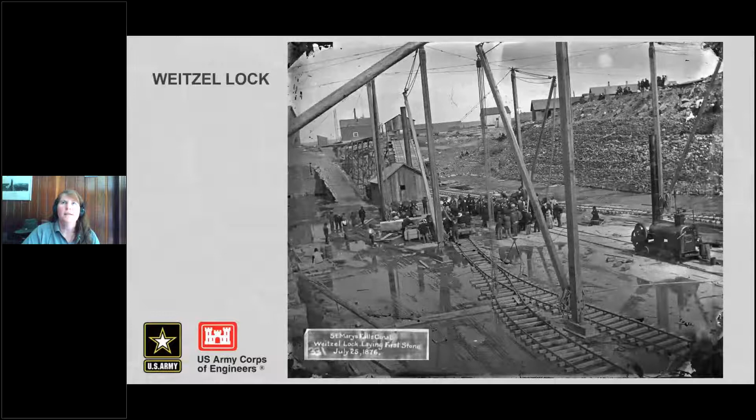The U.S. Army Corps of Engineers took on building a new lock just south of the original state lock. It's basically where the MacArthur lock is today, if you've been to the Soo Locks. The excavation began in 1873, and this photo, taken 3 years later, shows the laying of the first stone. So that's right over here - you've got a nice little crowd of people come to watch. This stone, by the way, is in the park, so if you visit the Soo Locks, you can actually go and see this first stone for the Weitzel lock.

We only have a few construction photos of the Weitzel lock. This one, taken a year after laying that stone, so this picture is 1877. You can see that it's being made with cut stone blocks, and you can kind of start to see this chamber starting to take shape.

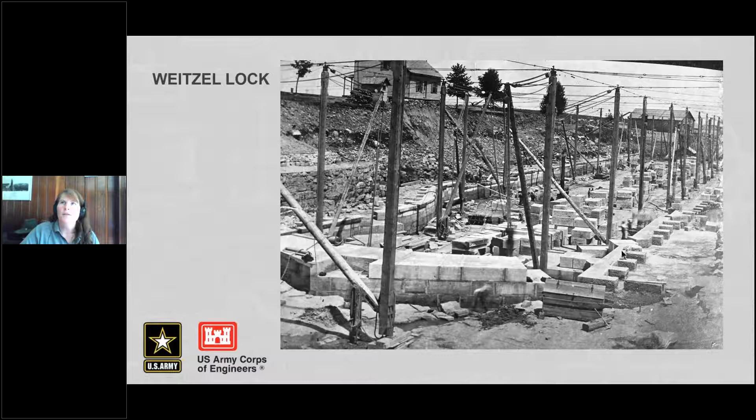The Weitzel lock: 515 feet long, 80 feet wide, 17 feet deep. When it opened in 1881, Michigan got completely out of the Soo Lock business, and the entire facility was turned over to the federal government, and the U.S. Army Corps of Engineers has operated and managed it ever since.

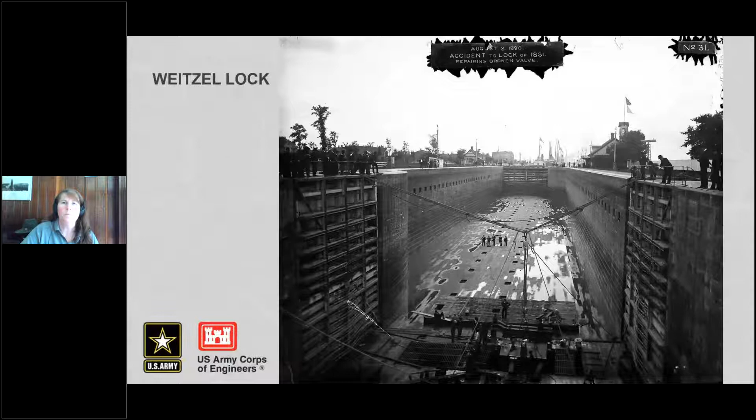This is one of my favorite photos. What amazes me are these little boys down here in the lock. This is a big opening with water flowing through it, and these kids are just running around down here barefoot. I don't know how they got in and out, I presume there must have been a really tall ladder. This is about a 40-foot drop from the surface to the lock floor. And look at all these people on the edges, no rails, they're all just standing around to watch. It's amazing.

I'll also point out this lock is shut down. It's August 3rd, 1890. That means there is no traffic passing through the locks because there are no locks—the state lock is now a construction site, and there are no locks on the Canadian side of the river. Despite being shut down, this lock set a new record that year. It moved over 9 million tons of cargo in 10,577 passages, an average of 46 passages a day during its operating season. And now it's shut down for several days to make a repair.

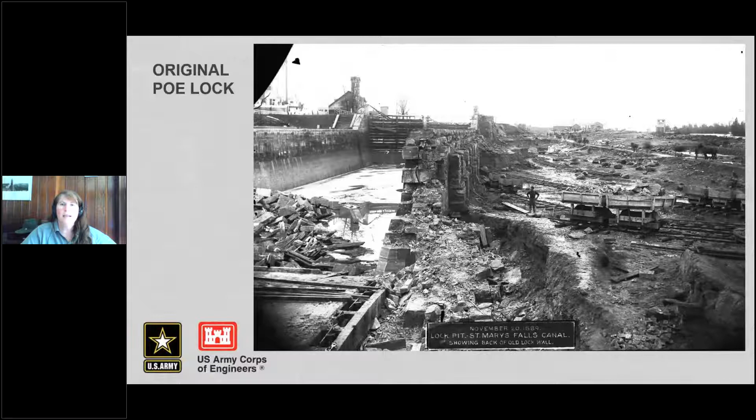And this is one of the last photos of the chamber of the state lock. So here you see the recesses for its gates, and this is one of its chambers.

And actually I have no reason for this other than I love that dog. He's one of several dogs that show up in the construction photos. And I have to say I wish we had a Soo Locks dog now.

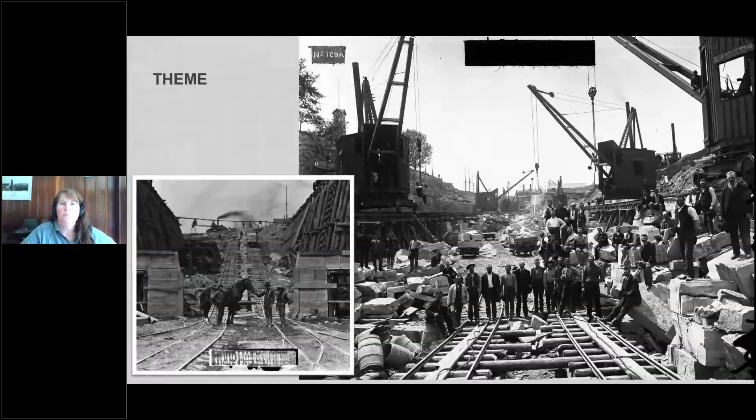Like the Weitzel and state locks, this lock was stone masonry construction. The area now known as Brady Park was the site of Fort Brady at that time, and they had a pier here for loading and unloading vessels, with stiff leg cranes for unloading vessels, and a mobile crane for moving stone within the work area.

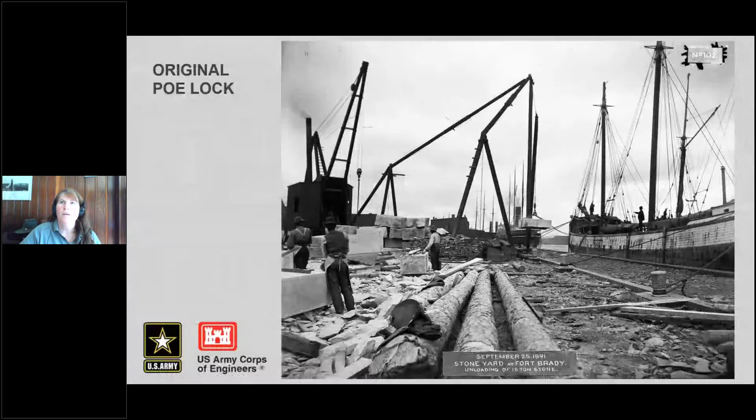Here you see one of the stiff legs unloading the quarried stone from one of the barges. There was a planer in Fort Brady which they used to finish the stone. Once the stone was finished, they had to load it back onto barges to take it to the work site, because the work site is north of the Weitzel Lock, so it's essentially an island.

Once on site, they use these mobile cranes to set the blocks in place. Here they're just finishing up one of the miter walls, and everybody came along to pose.

One of the things I think is kind of interesting too is just the sheer amount of work that went into these auxiliary items for construction. So you have to build this span, this bridge practically, to run your mobile cranes on. They've had to build a little roadway going up with a rail line. And then, of course, they have all these stiff leg cranes for unloading the barges that are bringing materials.

Once the chamber monolith was constructed - that's the lock walls, the outer structure of the lock - there was still a lot to be done. These guys are testing bolts. This is a wooden floor, just like the Weitzel lock, so it's all going to be bolted down.

I will also mention most of the negatives in the glass plate collection are pictures of big things and big structures and lots of documenting of machines and parts and rock. These are some of my favorite photos that actually show the guys working and the hard work that went into it, and you can really see the effort they're putting into it. Any of you who follow our Facebook page and the winter work images will probably know that I'm kind of biased, because these are the kind of photos I also like to take.

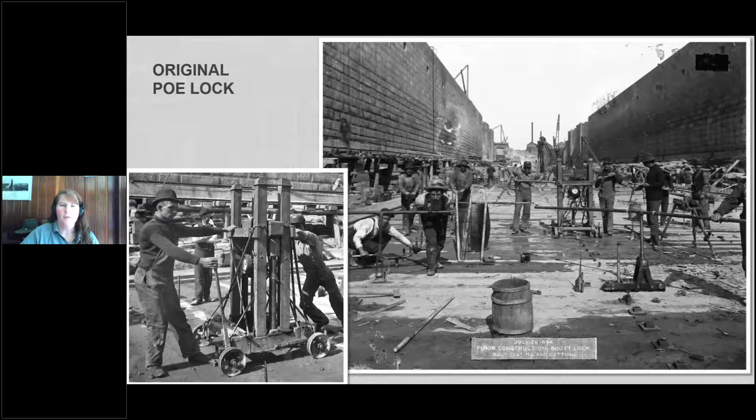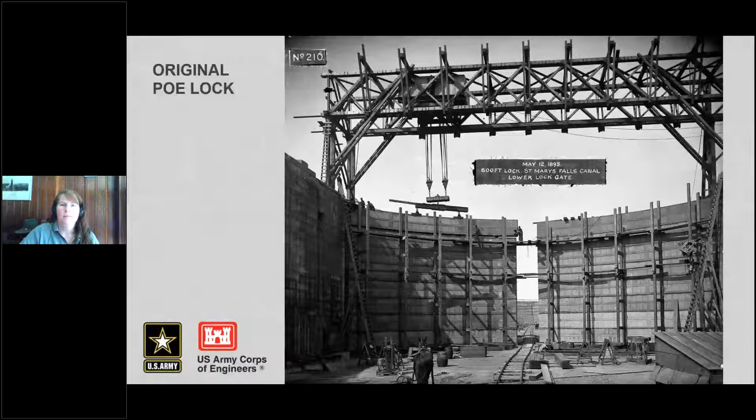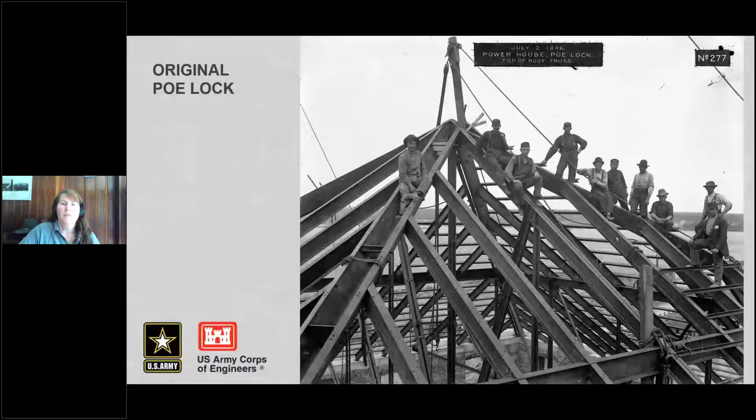On August 3rd, 1896, the Poe Lock officially opens. The U.S. Hancock, U.S. Antelope, and U.S. Revenue Cutter Andrew Jackson were the very first vessels to pass through.

So the name of the Poe Lock, I will confess, I get a lot of strange looks when I'm talking to the public about it. It's actually named for this gentleman, General Orlando M. Poe. He was a Civil War general, and he served twice as the Detroit District Commander.

He oversaw the design of a very distinctive Great Lakes lighthouse style with large conical towers and attached dwellings, kind of like the Au Sable Light or Spectacle Reef Light. He was overseeing the construction of the Poe Lock, of course. He had come up for an inspection of the work site in late 1895, and he was injured.

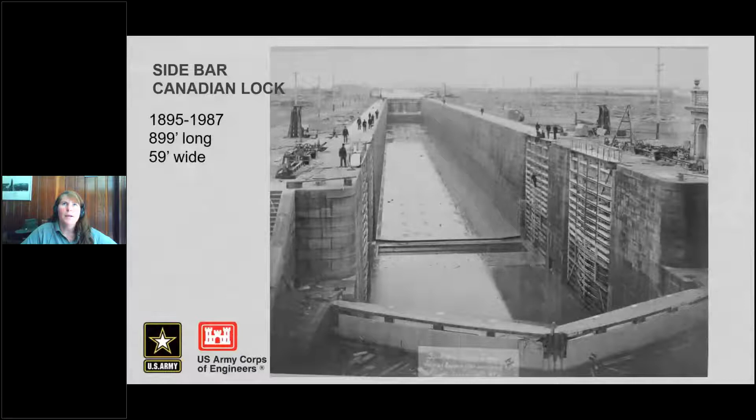Here we see a picture from the 1909 lock accident, which was pretty exciting to be there, I presume. The lock was at high pool. There was a passenger vessel, the Assiniboia, in the lock, secured to the wall. The Crescent City, a freighter loaded with iron ore, was coming into the lock, so the water is up 21 feet higher than what you see here.

Below the lock, the freighter Perry G. Walker rammed the gates and caused a breach, which ended up forcing these gates open. The upper gates, you'll recall, were open because the other boat was coming in, and basically it sent a wall of water 20 feet high out of the lock. The two vessels came screaming out at about 40 miles an hour, and it tore these gates off their anchorages—this one is completely flat, facing the reverse direction it's supposed to go.

They were able to use their emergency swing dam. This is kind of like a swing bridge, but it swings across the lock. They drop these shutters down, or wickets down, and then they lower the shutters within the wickets. Within three hours, they had the water under control enough to be able to operate auxiliary gates and start making repairs.

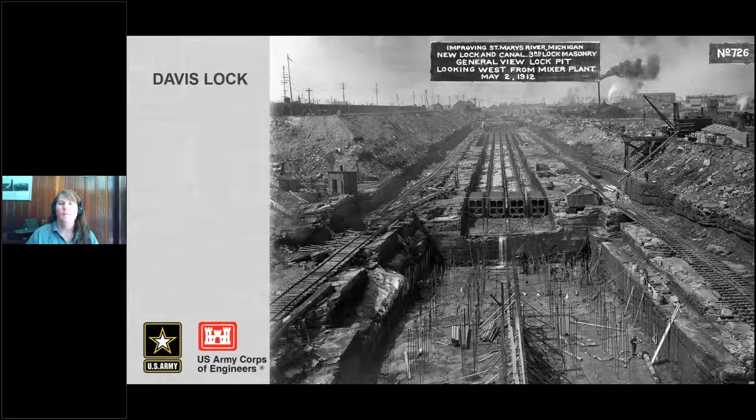I want to point out the channeled rock here. They had to cut through the bedrock to make the space to put the lock in. Here you can see a close-up of those culvert forms, and another nice picture of the guys working. I'll point out one of our volunteers, it was a member of her family that owned the lumber mill that sold most of the lumber to make all of these forms.

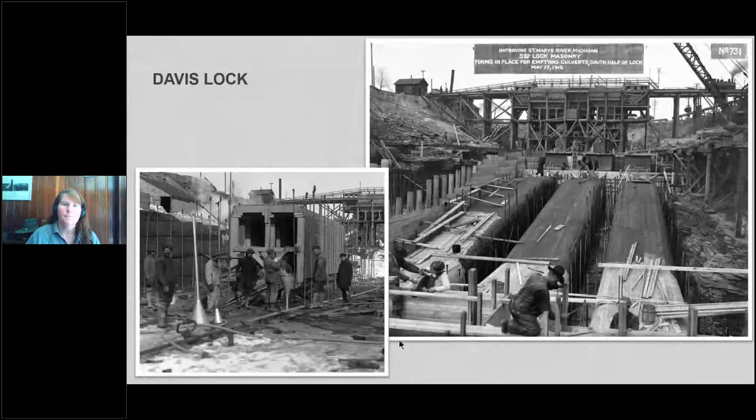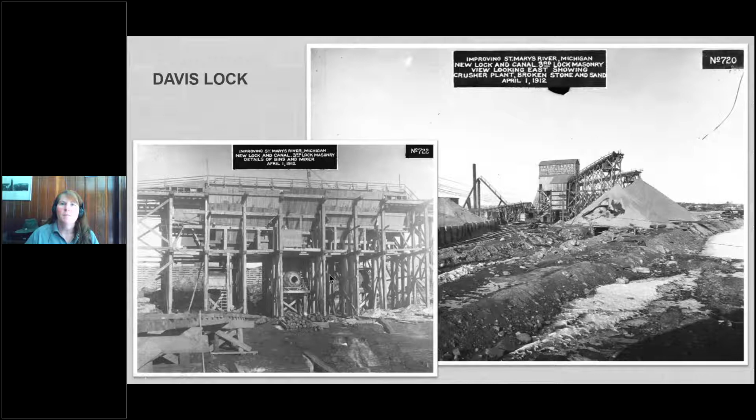The Davis lock was the first one built with poured concrete, and to do this efficiently, they installed a rock crusher and a cement mixer right on the site. Then here you see the forms for the miter wall set in place, getting ready for placing concrete. This is what we would call a sill now, the structure within the lock that the gates rest against.

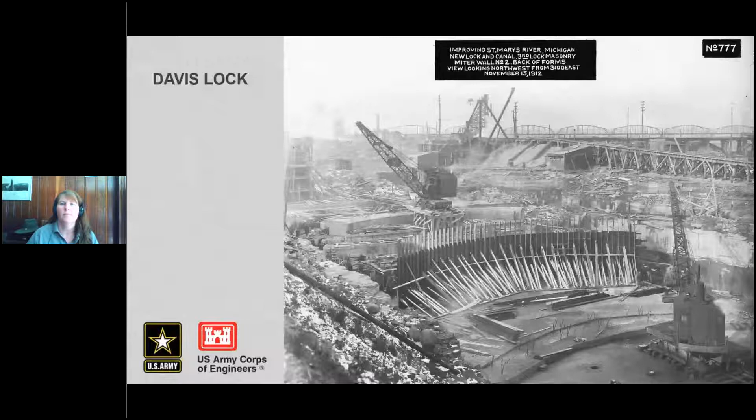Here you can see the huge forms for the lock monolith walls. You'll notice these forms are mobile, on rail tracks, so when they finished pouring one, they could slide it down and start the next one. They pour them in alternating sections.

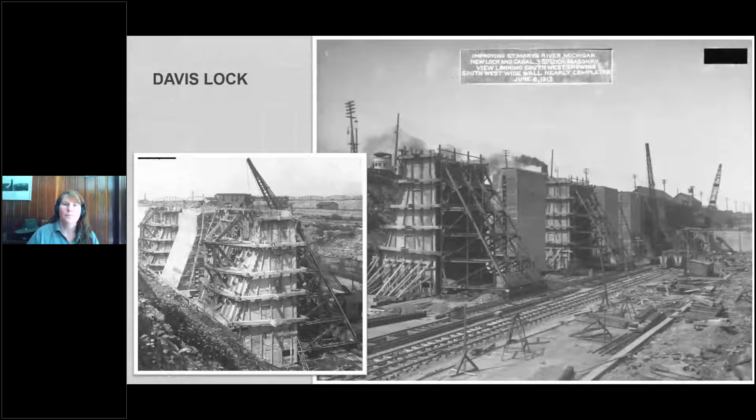Here you can see how the walls flare out at the base and how at the thick parts, it's massive. I have an engineering-minded son who likes Fermi questions, figuring out an impossible thing. He figured out that the concrete used to build this lock is enough to pave from Sault Ste. Marie to the Mackinac Bridge.

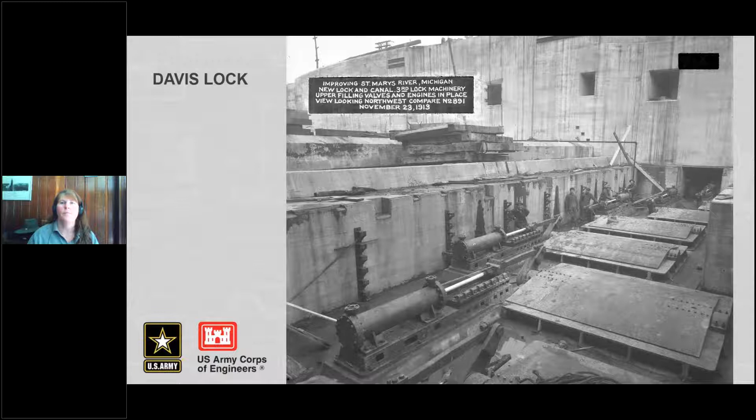Here you can see the butterfly valves. They operate like this to let water in and out of the culverts. In winter 1914, crews are assembling the lower gates. Again, no fall protection, and here you see these 2 guys up in the gate. I hope there was a little opening here they were crawling in and out of, but otherwise I do not see how they got in there.

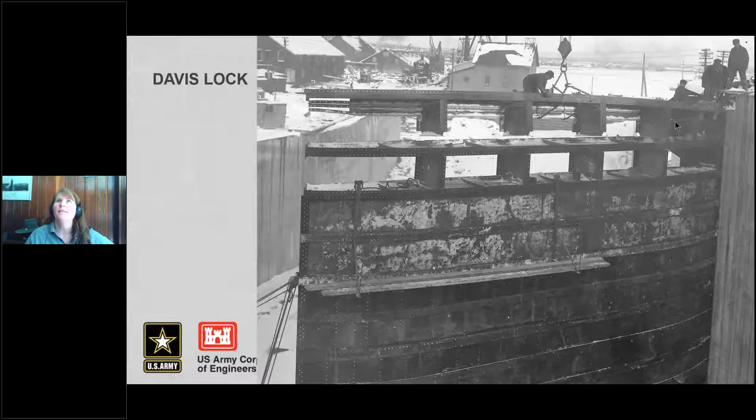And here you see the finished gates. This is one of my favorite photos, and this one is extremely popular. It was used in the Clark exhibit they did a few years ago about the Soo Locks. And with these guys here, you really kind of see the scale of this project.

In October 1914, the lock opens. You see a huge crowd coming to watch.

This lock was named for Colonel Charles E.L.B. Davis. He was the Detroit District Engineer from 1904 to 1908. I've tried to find out more about him, but I have been unable to. And there has to be a story there. Shortly after leaving the Detroit District, he eventually made it to General and retired the day after he was raised to the level of a general. I suspect there has to be a story. I can't imagine you make general and decide you've had enough.

Another 1914 event, which would make a kink in the lock plans, was the launching of the W. Grant Morden. It's 625 feet long, the longest boat on the Great Lakes at the time until 1926. The Davis lock was 1,350 feet long, so that it could lock 2 boats at a time. Well, once you start getting these boats over 600 feet long, that is no longer an option.

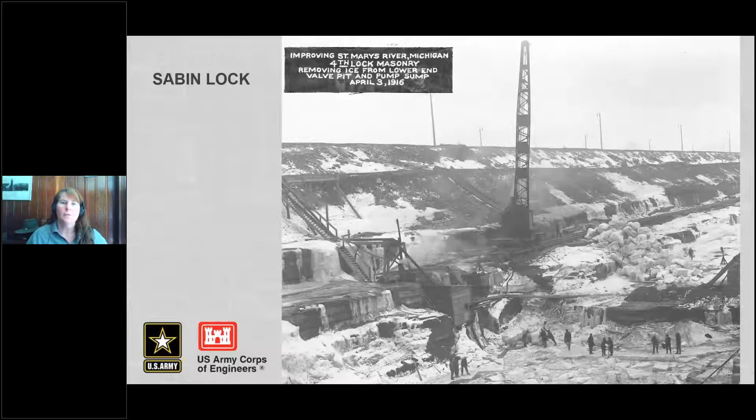This is 3 years before the lock opens. You start to see the monolith taking place. We're looking downstream because there's the administration building.

And one thing that amazes me, this is April. You see all the snow. I presume there's icy surfaces. There's a guy just standing here on the edge. I don't think that I could do that.

A few years later, they're getting ready to backfill that back side. You'll notice how this flares out, and they're going to backfill all of this in. The guys are standing here watching.

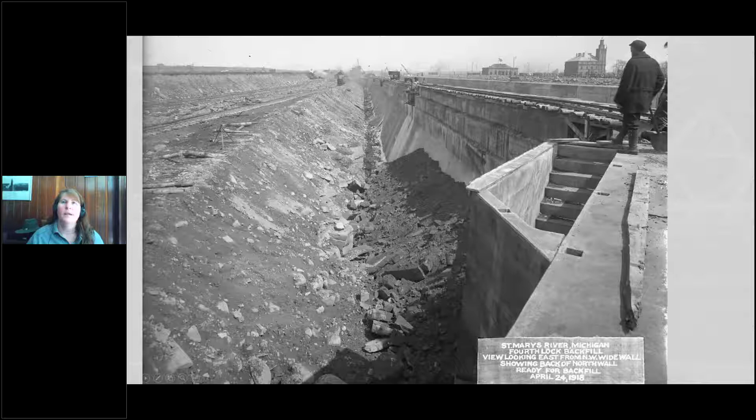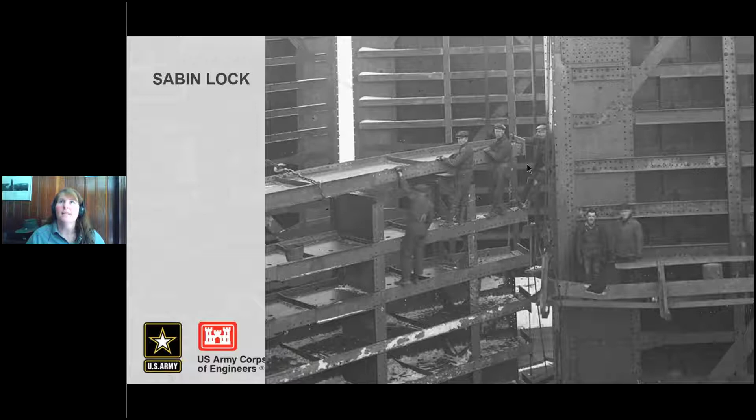And we're assembling the gates. Some of the work and the way they do these things to me is just absolutely terrifying. This guy's just hanging on by one hand. I wouldn't be able to do a thing, I'd be hanging on with both arms and legs. This guy's kind of leaning on the other one, big old smile for the camera.

Here in 1919, the lock's almost finished. They're looking upbound. You can see that gate they were building is now in its recess. Up here is the Bascule Bridge. When this was set in place in 1913, it was the largest bascule bridge in the world. That bridge is still at the site, still operational, still crosses that canal. And here you see the railroad again; that's how we know we're looking upstream.

6 years after that first blast of dynamite, they're ready to fill the lock. This lock had bypass valves in its forebay at the upper end. So there's an opening over on this side that's letting the water from upstream come through here and then start filling the lock. The boat in the Davis lock next door to it there is the D.M. Philbin. It's a 524-foot Duluth Steamship Company boat, and it actually sailed till 1980. A week after filling the lock, they had the official opening.

This one was September 18th, mid-September. You'll notice there's not many people there, which makes me wonder if it was an unseasonably cold day. It gets cold in the Soo, but usually mid-September we still have pretty nice weather. All these people are wearing coats when I zoom in on them, and we caught one of the photographers getting his shot there.

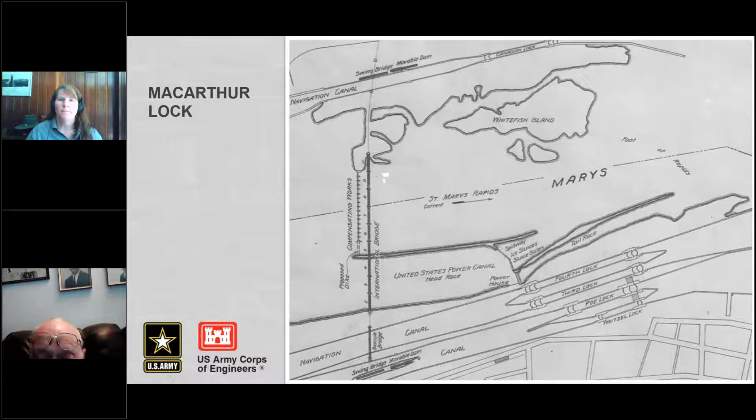Part of the speed was probably due to meticulous planning and doing several things at once. For instance, the excavation of the chamber is already going on, but they're still finishing the cofferdams to create the dry workspace.

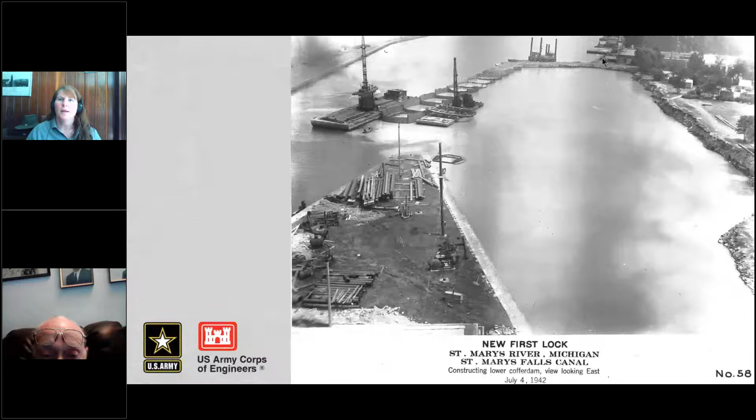We've looked at a lot of construction photos, so I'm going to not go into as much detail here, but I want to highlight some of the best ones I have in the little collection of photos I've scanned from our records room, and show how quickly the work progressed.

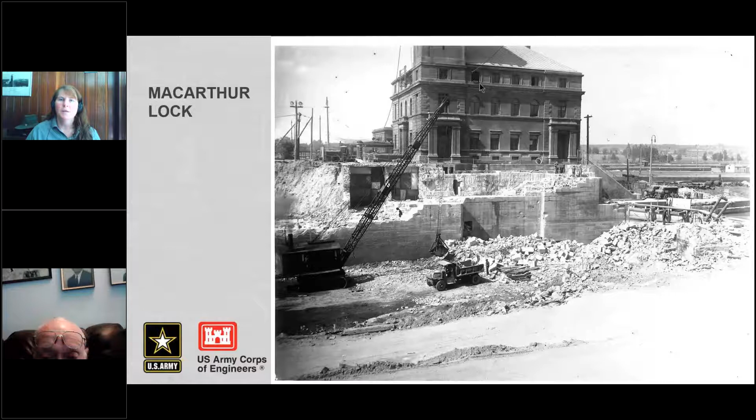And I have to say, I wonder how the people working in the admin building got there and what the noise must have been like with all of this going on right outside their windows.

And again, now the workers have hard hats, but still no fall protection. And it's amazing how close this foundation and the lock structure is to the administration building.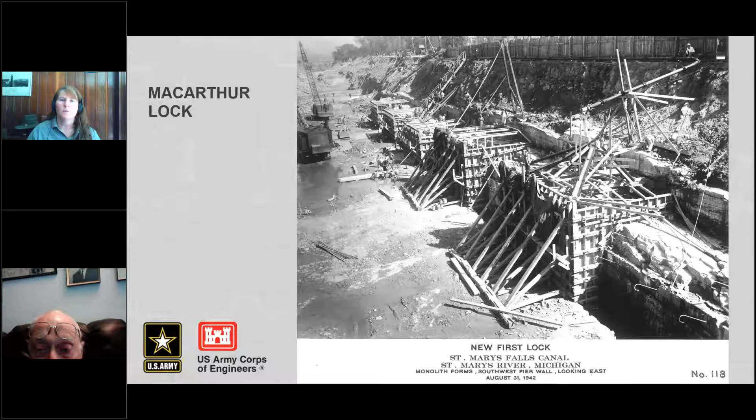By August, they were building the forms. These aren't on rails like the Davis and Sabin ones. And there were lots of other things happening at the same time. Way up here at the upper end, you see where they're building the forms. Over here, they're still doing the excavation.

4 weeks later, they filled in some of the gaps in that monolith wall structure, and they're putting in blocks to do the next layer of the pier wall.

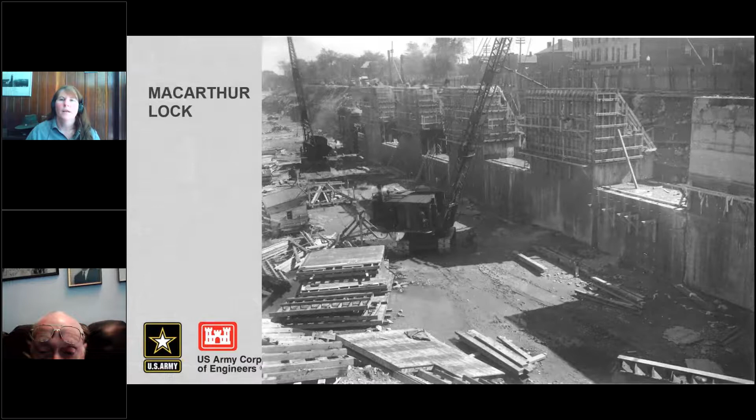Work went on year-round and around the clock on this lock. So they're working 24 hours a day, 7 days a week.

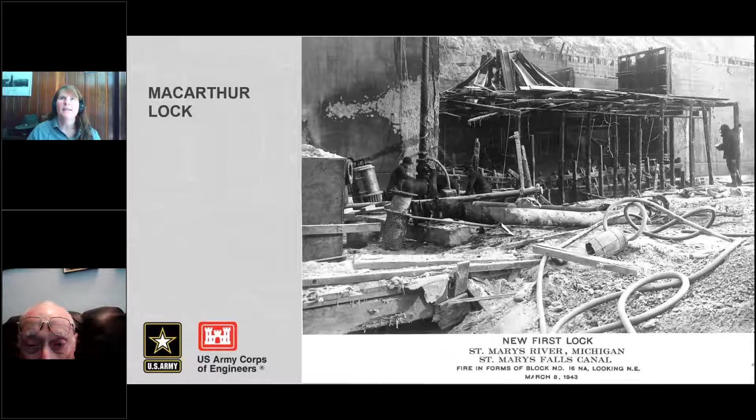Even concrete placement was happening year-round. So here they're building little shelters around the forms and heating them to keep it warm enough for the concrete to cure properly. And unfortunately, these forms sometimes caught on fire, and it would set the work back, and they'd have to remove the damaged concrete.

Here's a snapshot of progress as of April 10th, 1943. Remember, this lock is going to open and pass its first boat in mid-July 1943.

This is the same day. Here's the photo there, April 1943. This is what's happening at the lower end. Up here at the upper end, they're already building the lock gates. And again, lack of fall protection. This is about a 20 to 30 foot drop off this sill, and he's just standing there working with a tripping hazard right behind him. If that were me, I would definitely end up tripping over that box there.

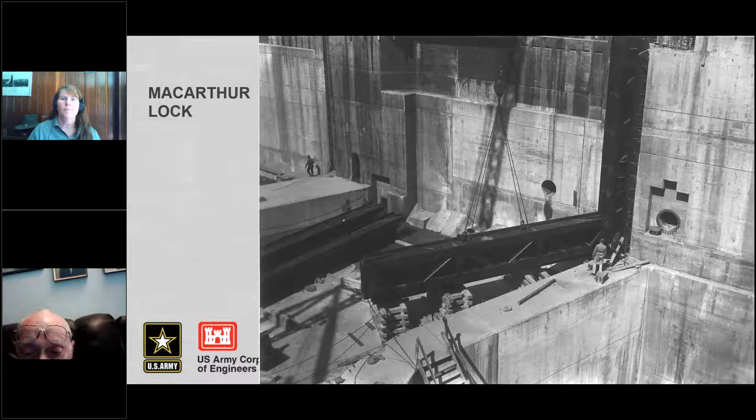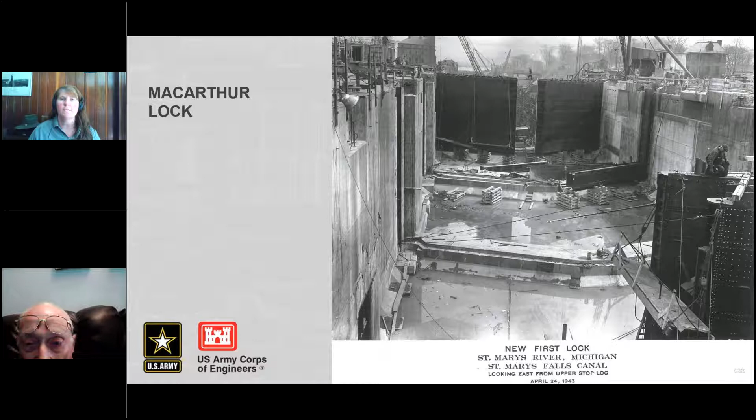2 weeks later, they're building the lower gates. The floor isn't poured yet, but they're also working on spare gates for the Davis and Sabin locks, which was considered a good insurance policy during World War II. In case there was an attack, they wanted a spare set of gates. This is the same day as building those lower gates.

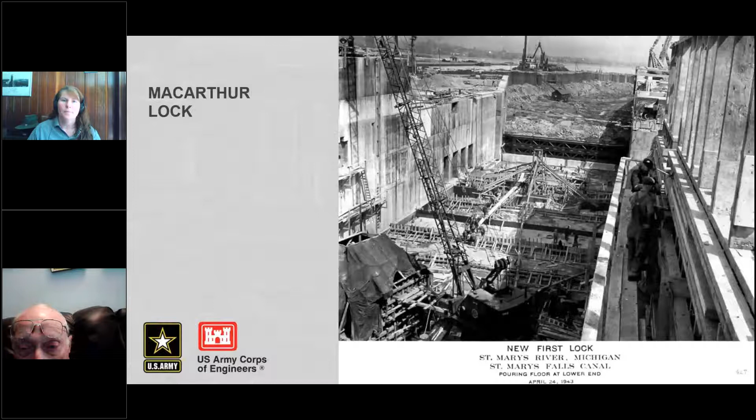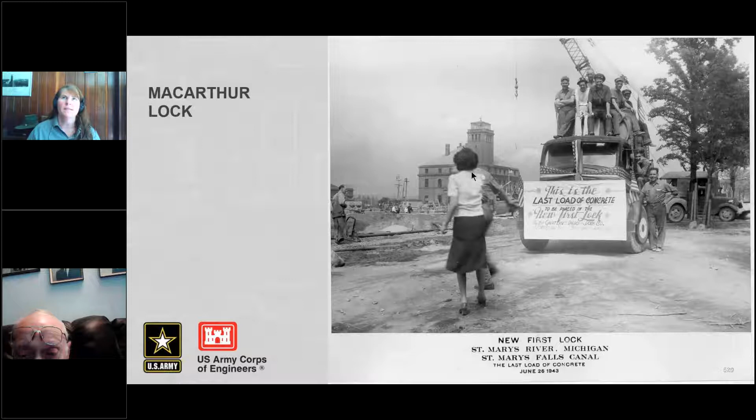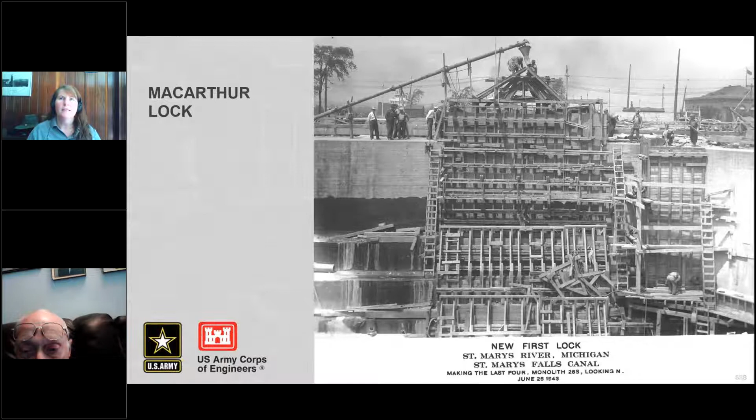June 26th, the last load of concrete came. This is a kind of famous picture. I always like to imagine that maybe this is one of the secretaries who worked in the admin building, but who knows? They're placing that last load of concrete, June 26th, 1943 - 16 days before the lock is going to open.

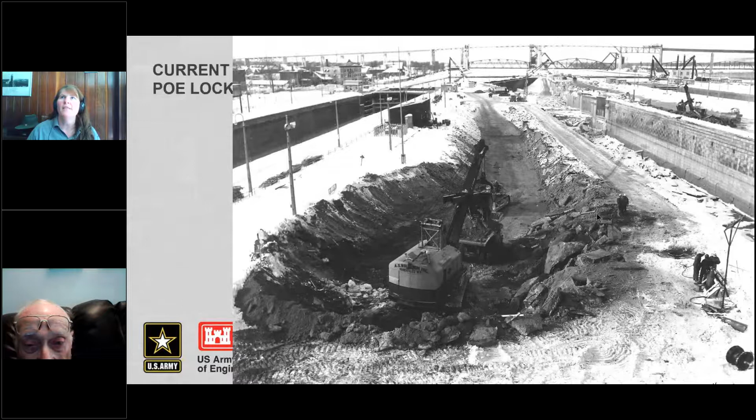On October 16th, they were finishing the cofferdams to start construction on this new 1,000-foot long lock. January '62, they're doing the excavation. They're working behind that original lock chamber right here.

Here's a view from inside the chamber showing the remnants of the Poe lock. So there's the remnants of that original wall in February. They had to cut up the original gates - those very first steel gates on the river - into smaller pieces so that they could lift them out and complete the excavation.

In March 26th, you can see it's a much bigger hole. And here you can see also the highway bridge is being assembled - a brand new construction that's going on at the same time.

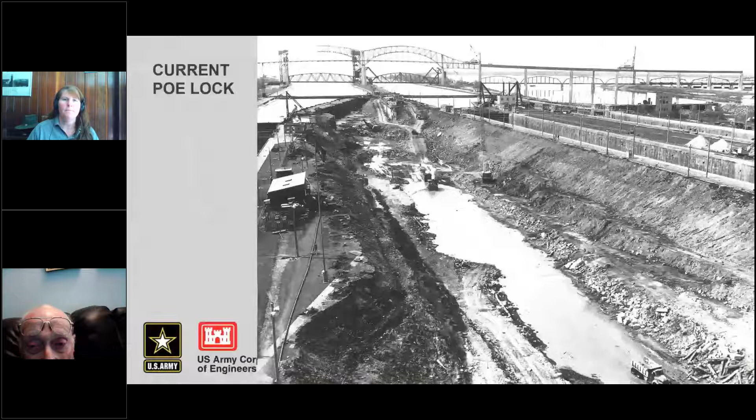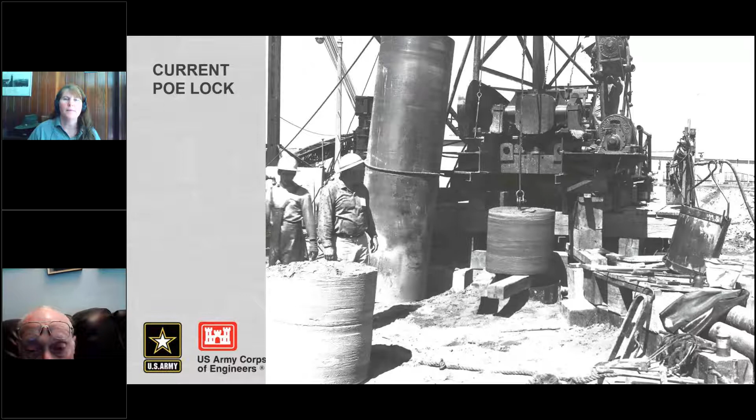In June, they were taking huge core samples of the bedrock to have a better understanding of what's below the lock surface, and sometimes how much they're going to have to excavate to have a stable space for it. You can still see one of these core samples if you come to the park at the Soo Locks, out in the west end of the park.

A friend of mine, I won't name any names, is a deckhand and was let off here to walk his boat in, and he thought he dropped his wallet. He sent me a message asking if I could find his wallet. So it was probably about 10 degrees out and windy, and I walked this entire length there and back looking for his wallet. Then I got back to my office and saw a message from him that he had found it. It was in his other pants.

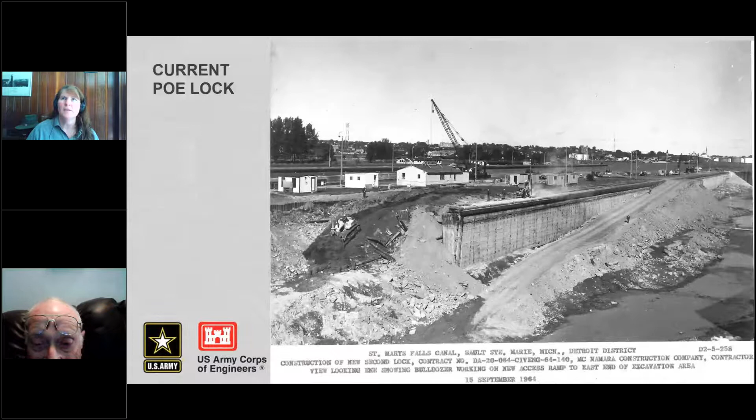They also have to build roads and ramps within so they can get materials in and out of the lock area.

I will point out too that this is also an island construction, and this one is actually happening between two active locks. So while they are working on this lock, there are boats going through on each side, through the MacArthur lock and through the Davis lock on the other side. All of that excavated material they have to take out has to be loaded into dump trucks, dumped into barges, and then taken away.

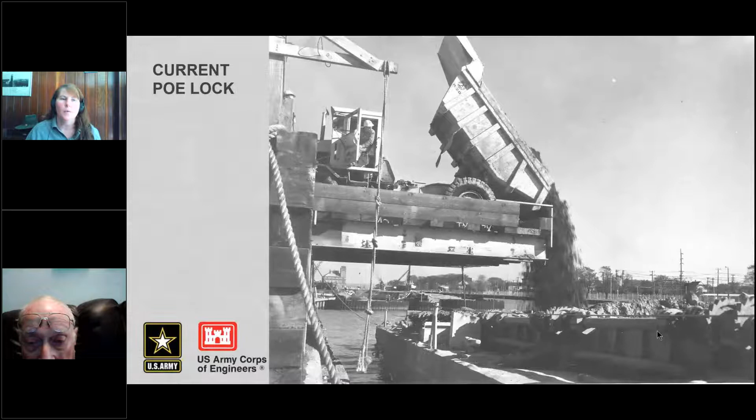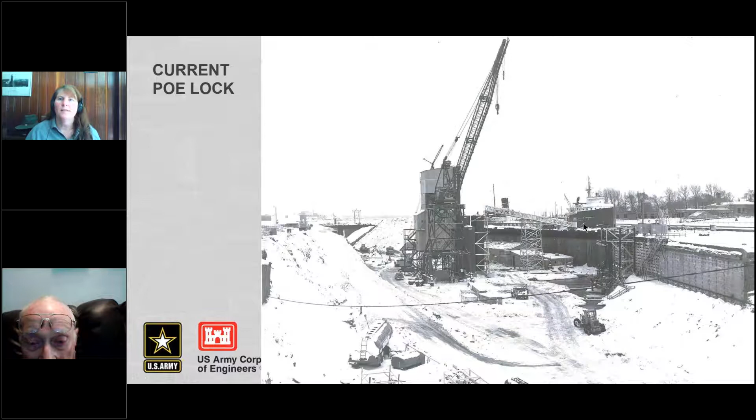February 1965, they're setting up the mixing plant at the lower end. And this boat right here is the John W. Boardman, a cement carrier, and it is bringing materials.

This is April, and this one makes me laugh. The caption says, 'Second pour.' So this was the second pour for the new construction. I wonder what happened that they missed the first pour. You can see it right here, but I wonder, did the camera fail, or did somebody not tell the guy it was coming? But they got a picture of the second pour.

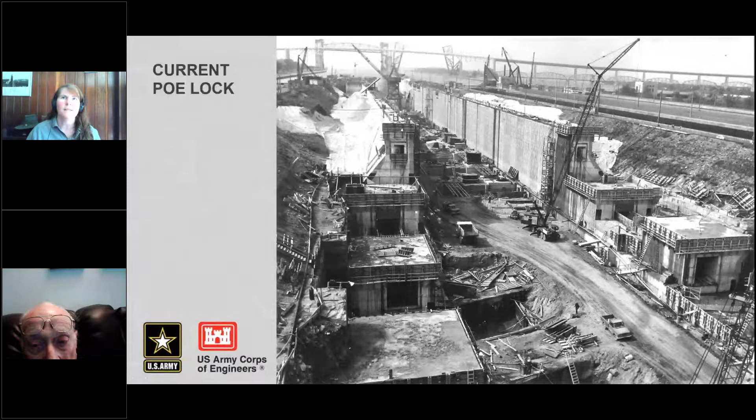September '66, I don't know who the photographer was, but I am so thankful they took this picture and from this angle. I use this photo all the time to show people where the culverts are and basically what a cross section of the monolith looks like. This is the only picture I've ever seen of any of the lock monoliths that is so revealing.

In May 1967, they're setting rebar for the laterals. The laterals are where the water comes in and out of the lock chamber through these little openings and tunnels that connect to the culverts in the lock walls.

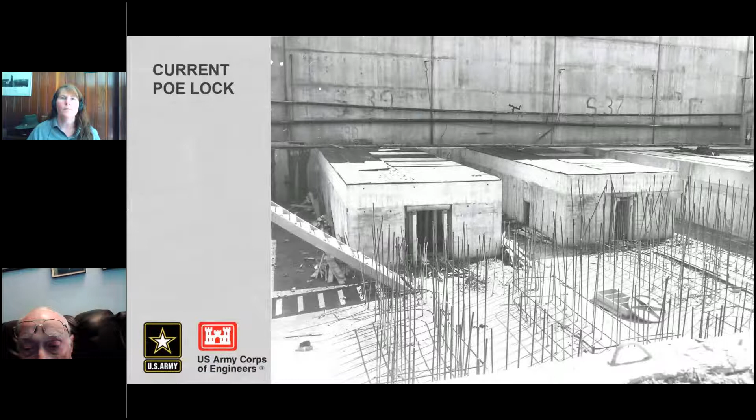Here you have an overhead view of the work that's going on. These parts right here are the forms where the rebar is, where the concrete is going to be poured. And then they're, of course, having to also build the little openings in there to make the void when they pour the concrete.

Here we have August 1967. The lock is getting awfully close to done.

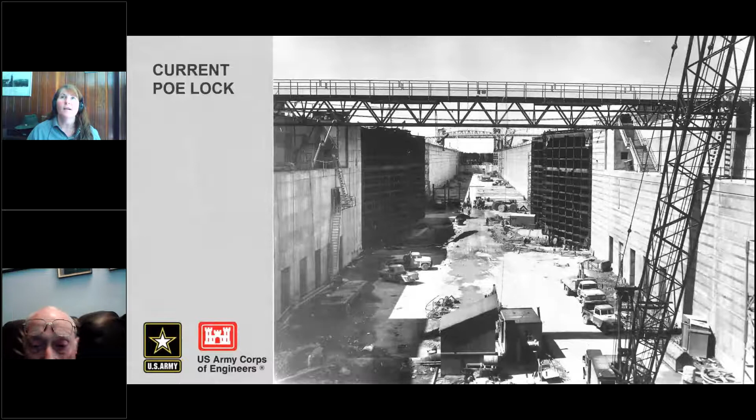This is June 1967, and here you can see those laterals on the floor. Those are the openings that the water comes in and out of when they're raising or lowering the water levels. I will also point out a little spot near and dear to my heart, the visitor center right here, which was new construction during the Poe lock project, built to facilitate visitors coming to learn more about the facility.

Here they have done more work. They've taken out the crib dams over here, and they are using the lower guard gates and the stop logs to hold the water back while they finish the construction.

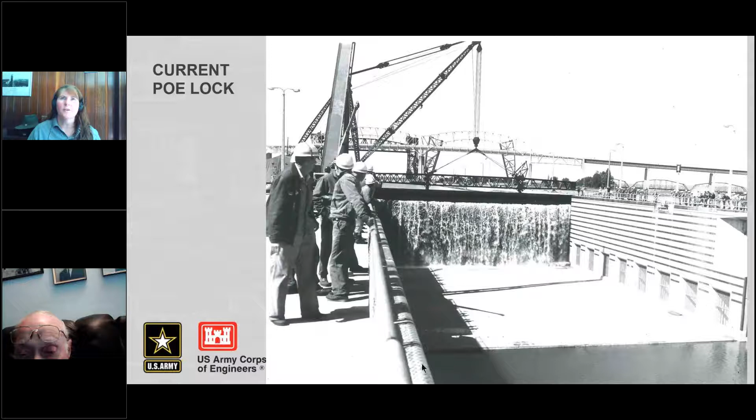By the end of August 1968, they start filling the lock. This one they do by lifting the logs. It's always an exciting thing when they lift the logs to re-water the lock, and I imagine this one must have been even more so since it really is the very first test of a newly constructed lock, how it's going to behave when they start filling it with water.

Then it had its second test, and this is October 30th, 1968. This is about a month and a half after yours truly was born. I like to say the lock dates from 1968, so it can just be my age, but they like to give the official date when it opened.

Its second test was locking the downbound Philip R. Clarke with a load of iron ore. You can see all the white-hatted technicians and engineers on hand to see how this goes.

And it's hard to believe, but after they locked the Clarke through, the lock just sat. They did not use it again until June. Its tonnage for the year of 1968 was 20,248 tons - just that one passage of the Philip R. Clarke.

9 months later, the lock officially opens, and it's the Philip R. Clarke again, coming upbound. You can see a huge crowd - the governor was there, and several congressmen were there to give speeches.

And up here is one of the most honored guests, in my opinion. That's Captain Small. He was a deckhand on the first freighter to go through the original Poe lock in 1896, and he was an honorary captain. He was actually a captain in real life in his career, but he had retired. He came back, and he was the honorary captain of the Philip R. Clarke going into the Poe lock for that first time.